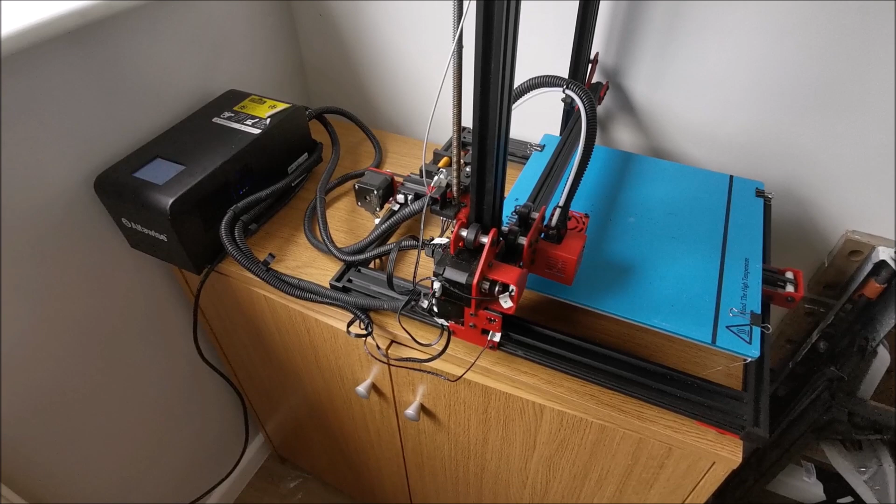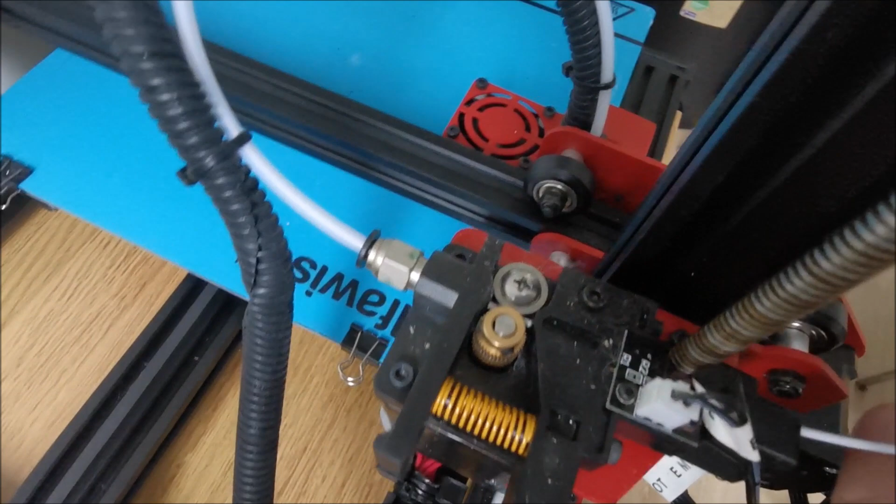So this is the 3D printer. What it consists of is this reel of PLA material that goes down here into this extruder. Basically it's two little wheels that push the filament down this pipe, and then that goes to what's known as the hot end, which is where it gets melted.

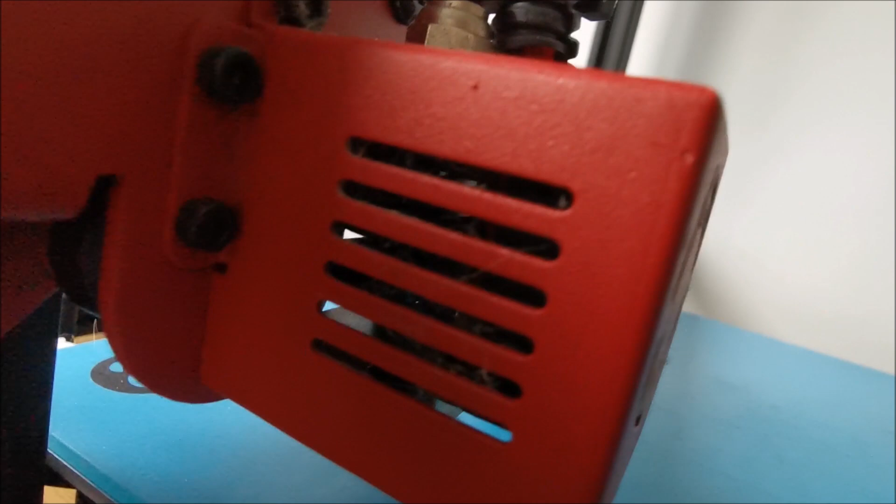And if you look underneath, you can just see the nozzle and a little bit of filament popping out the end there, and that heats it up to about 235 degrees centigrade. To get the 3D element, this moves up and down, and then the bed slides that way, so that gives you two directions, and for the third direction there's a motor that drives this whole carriage up and down.

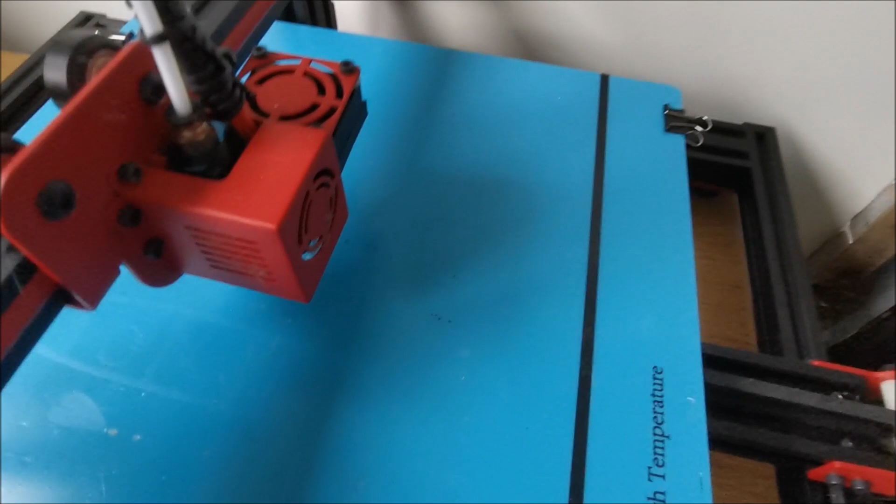So it will start printing onto this sheet, and it will do one single layer which is about 0.2 millimeters thick, and then it will move the carriage up another 0.2 millimeters and then do another layer on top. And all of that is controlled from this box over here.

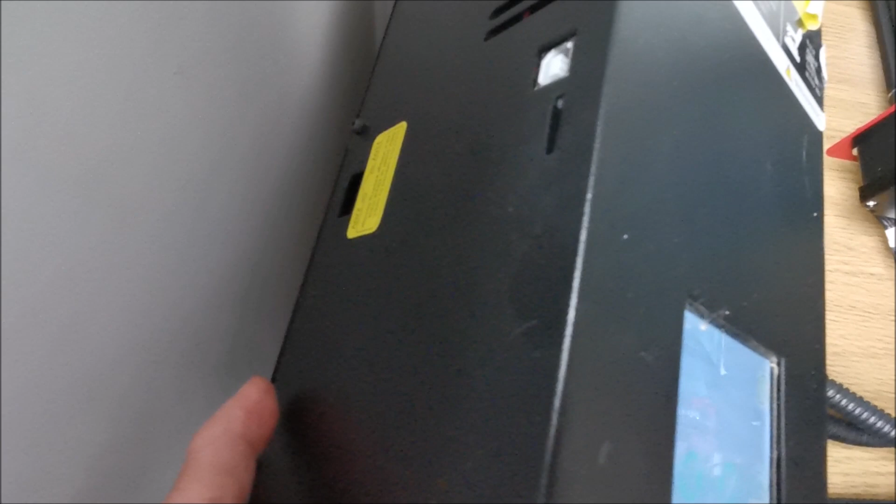There's a touch screen on this one, and on the side there's a memory card. You get your files from your computer, you download them and then you put them into the memory slot, and then you can send the information to the printer to print.

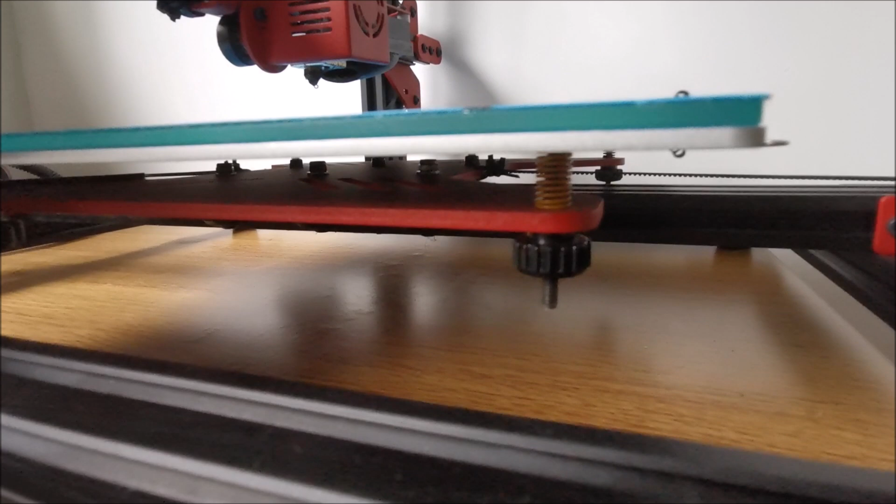But before you can do any printing, you've got to make sure that this heated bed is level. To do that you have to switch the printer on, heat up the filament, and also heat up the bed, so if there's any distortion in the bed through the heating up process, you take that into account, and then you calibrate the height of the bed by adjusting these little knobs underneath. So I'll go ahead and do that in a minute when it's heated up.

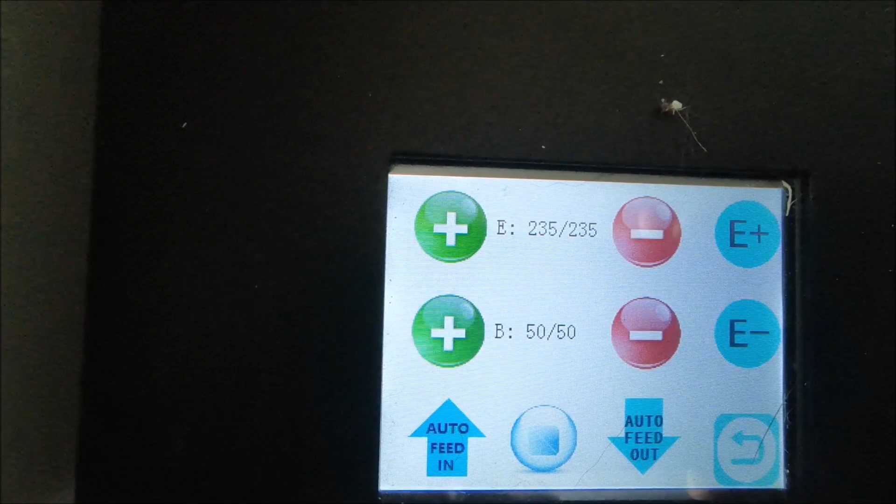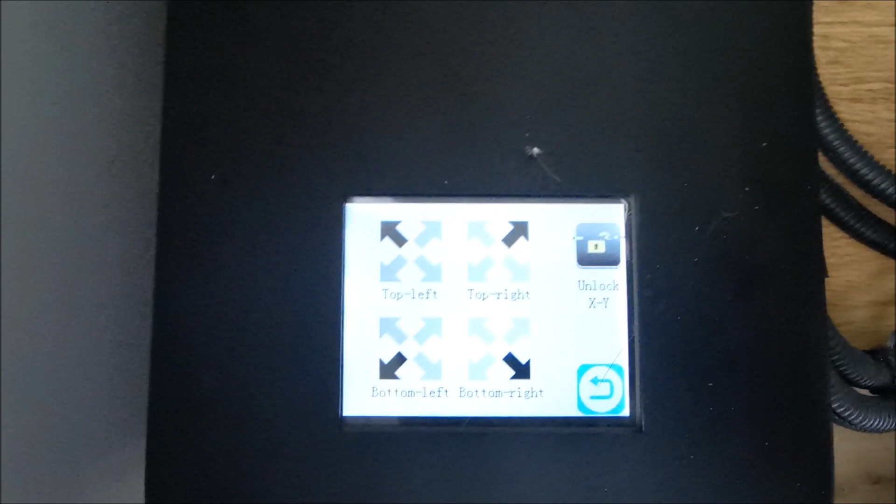Okay, right, I've set the temperature of the extruder to 235 degrees, and I've also set the temperature of the bed to 50 degrees. So now we can go ahead and do the calibration of the bed. So we'll go back a menu and do this leveling, and then if we press one of these buttons, it will go to the four corners, whatever one you select here, and drive the

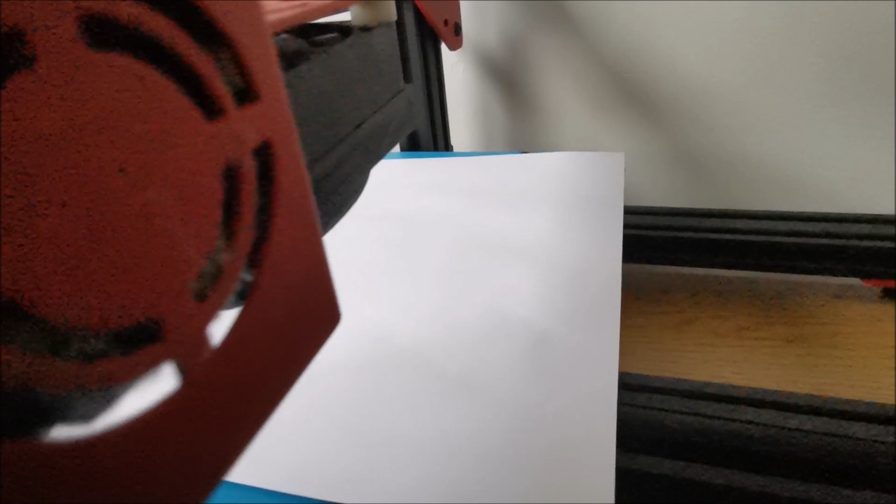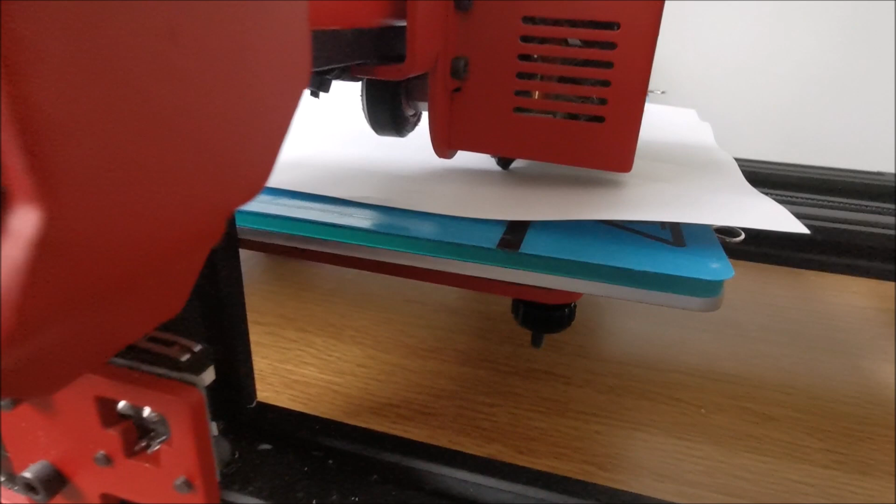What you do is you put a piece of A4 paper on the bed. This will drive down until this switch has been activated, and then you set the bed leveling by just having enough pressure on the paper, so you can move it up and down easily with just a tiny little bit of grip on the paper. So that one's not too bad. It's just like feeler gauges, if you're used to that. So drive to the other side.

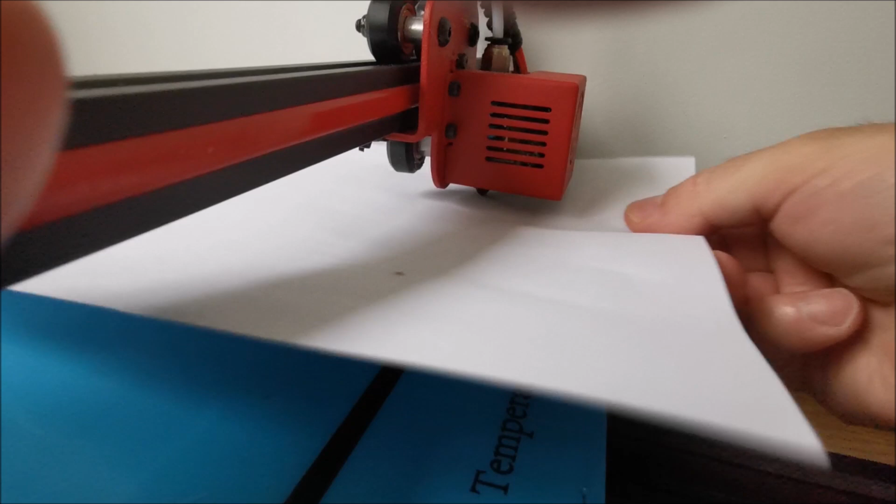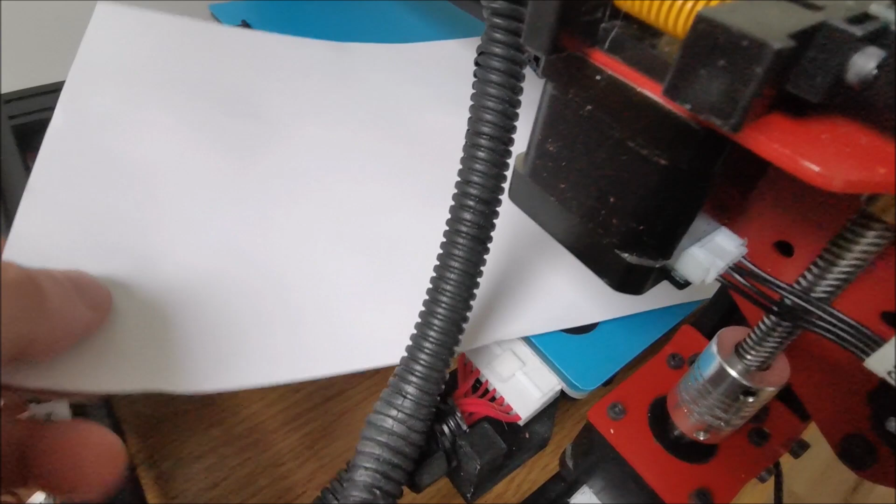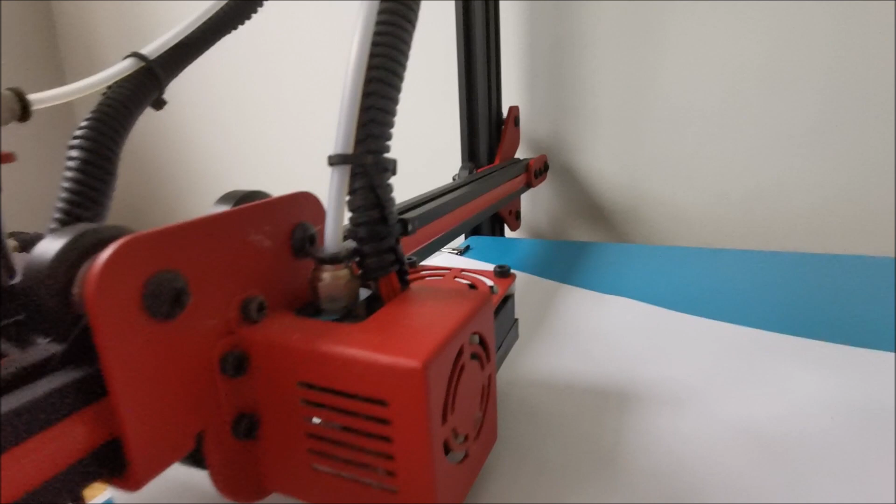I'm not expecting this to be too far out. It's just gripping the paper there. So we'll move to the other side. That's a bit too loose there. So I need to adjust this little wheel here, I'll be doing it the wrong way first, until it's a little bit tighter on the paper. So I'll go ahead and do all that and then we can start printing.

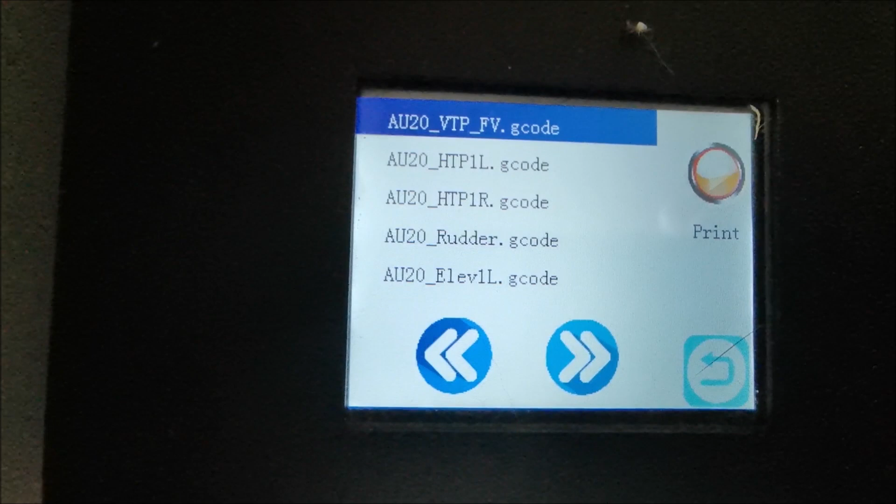Right then, so the bed is now level, so we're going to select a part of the plane to print. So I'll go to folder, and we're going to print this vertical tail. So all we do there is select it, and this G code is being generated by the computer, like I said before. So all the settings for the printer have already been decided.

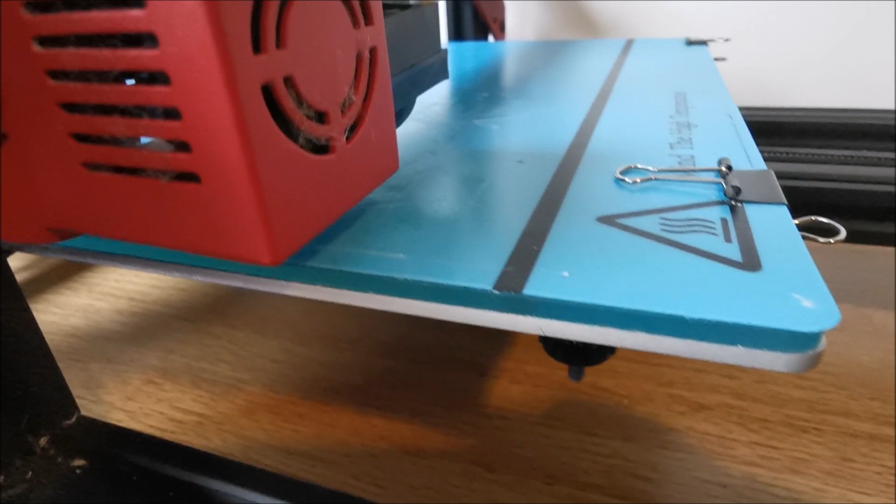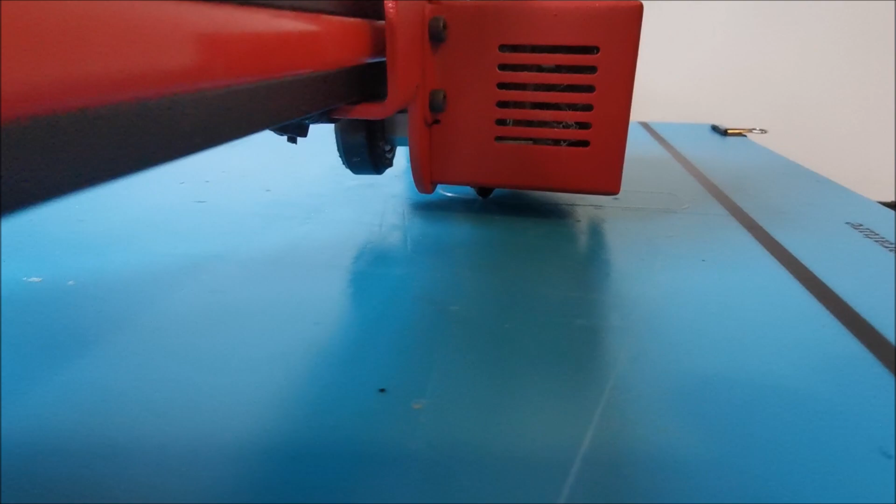And if we just want to print another one out, all you've got to do is select it, and as long as the bed is flat, you press print, the printer will home itself in the 0 position, do a little piece of test flow, and then it'll start doing a perimeter wall around the outside of this particular piece. It's quite hard to get the camera in here to show everything.

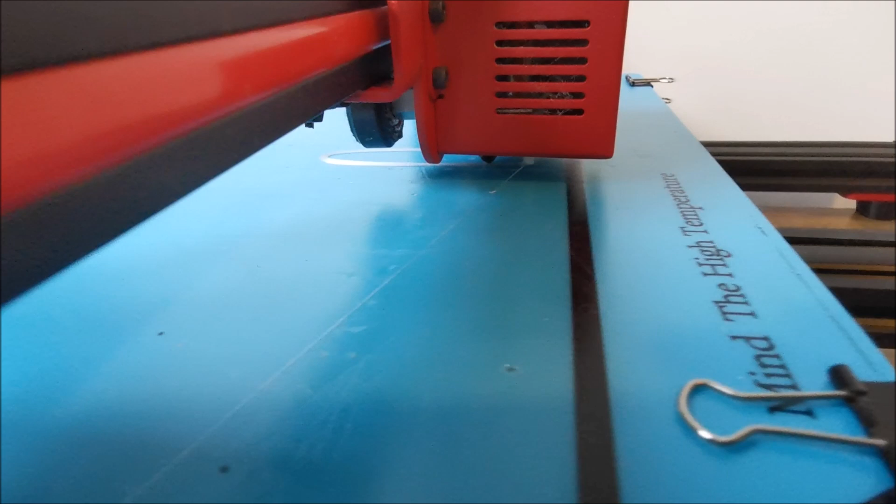So this is at the moment doing what's known as a skirt, which is a perimeter around the part you actually want to keep, and it helps it stick to the bed, because especially with these parts of the planes, they can be quite tall, and they can be knocked off of the printer bed by the movement of the head, or a slight movement in the air will just send it off.

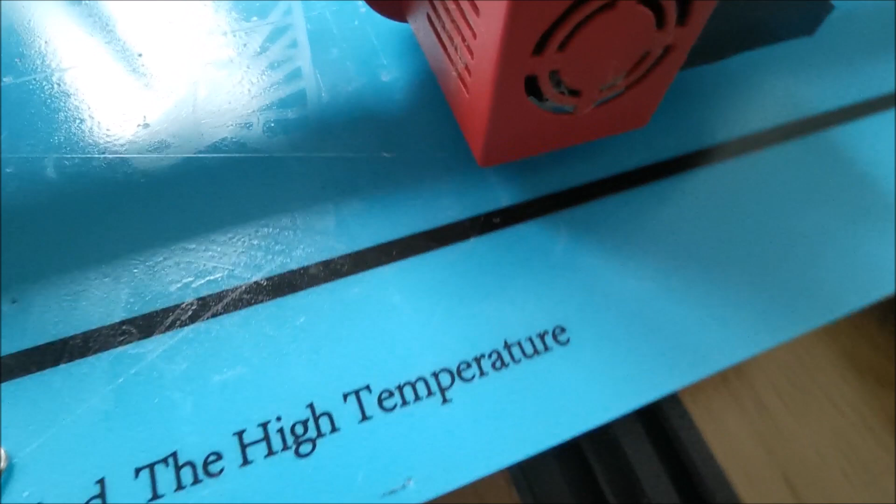So it's done the little perimeter, and it's starting to print out the actual part itself. We'll have to wait for it to move out of the way before we can see what it's actually done. And hopefully I can get it in focus.

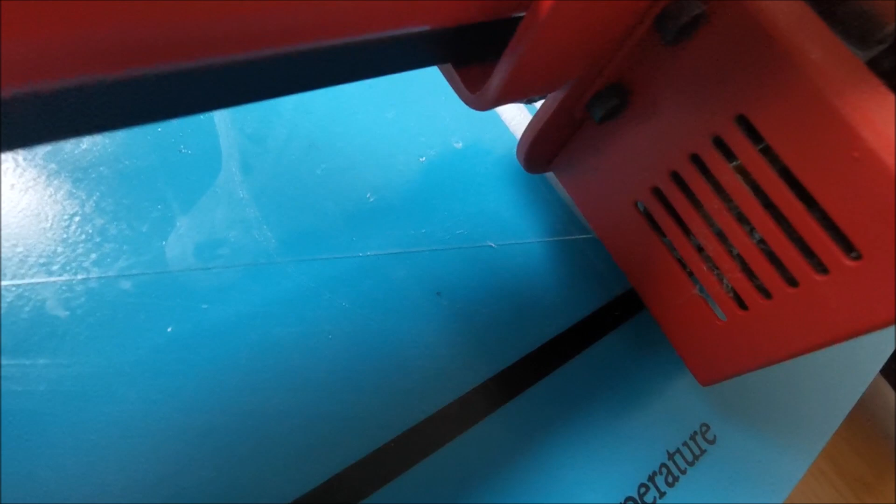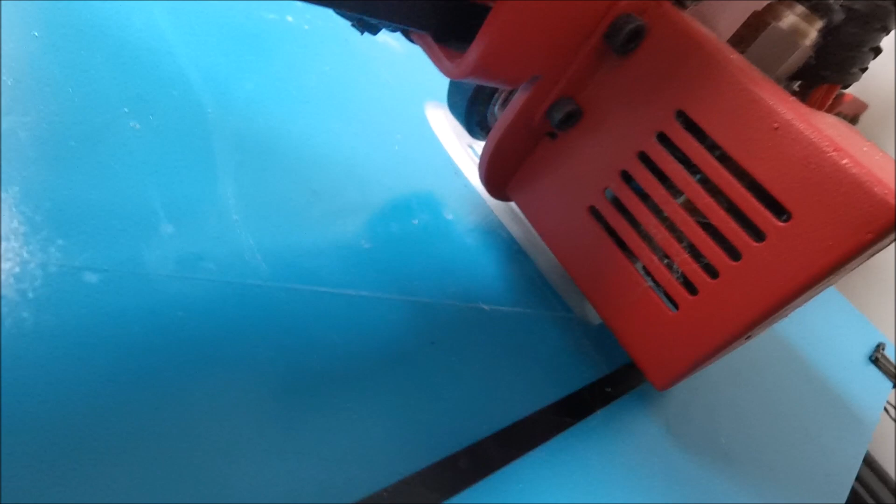So on this particular piece, it's printing a thicker base because you want a little bit of strength at the bottom of the tail. So it's going to do 6 layers, until it starts doing the little thin pieces for the outside edge. So I can get it down here.

Well, it's quite a slow process, as you can see, so this is probably going to take about over an hour to print this one piece out, so I'll pop back at various stages and you can see it then.

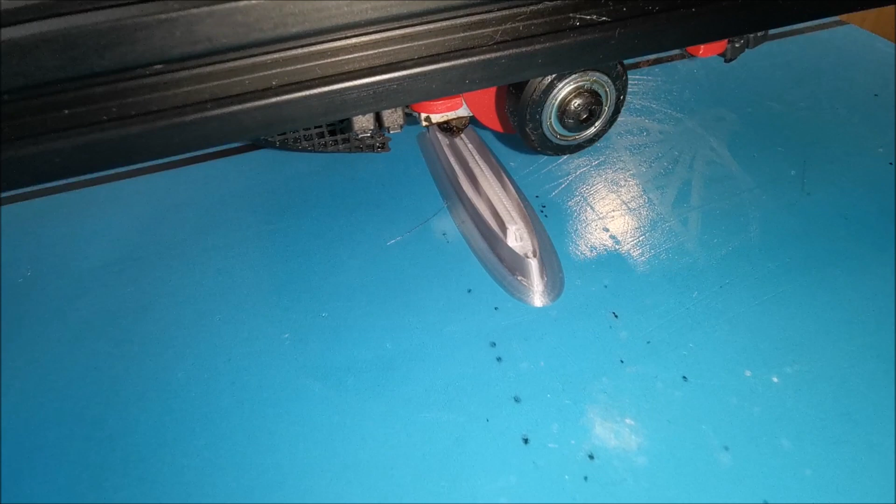What it's doing there with those small movements is just sort of stitching across the top, closing that end off, and then the rest of it will be hollow in the middle, and it will finish that centerpiece, and then the rest of it as it builds up will just be a hollow fin all the way up. I'll go around the sides so you can see if I can get to the bottom, see how tall that is now.

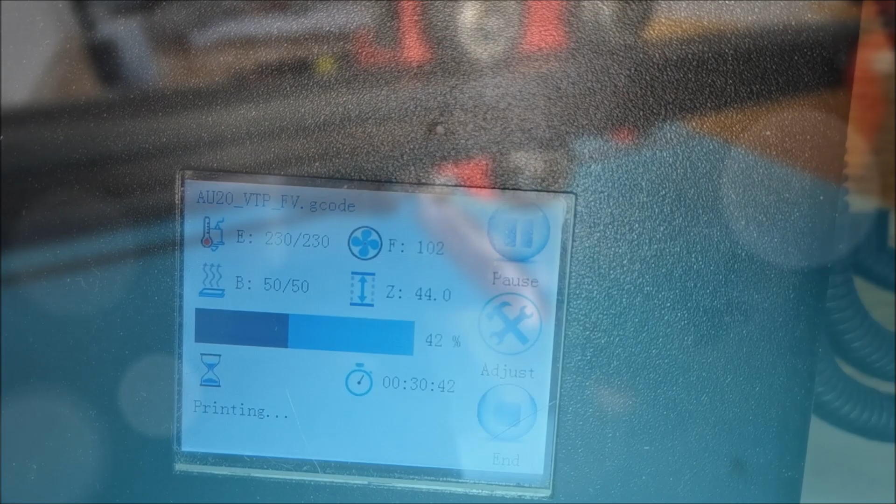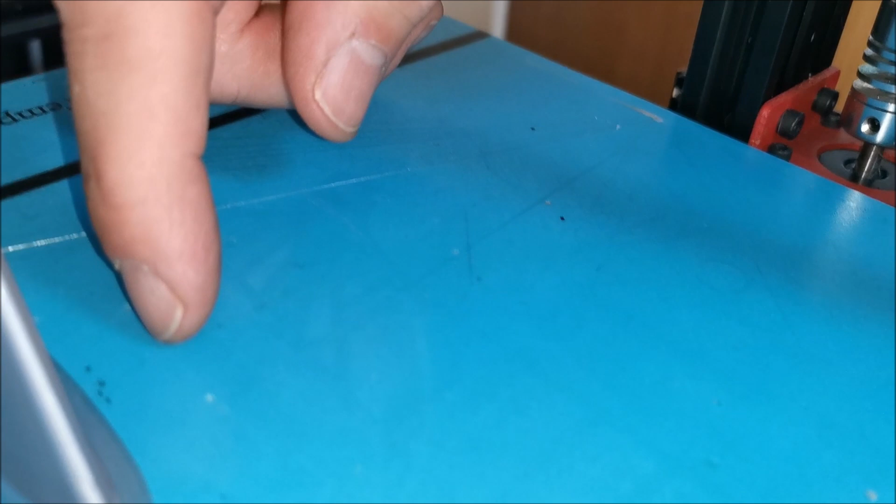Come back later. Well, it's been half an hour, so let's see what's been happening. Here we go. Are you ready? And that much has been printed. That's about, well, look at my finger by it, you'll see. Not that much. It's a slow process. So we get a bit closer on that.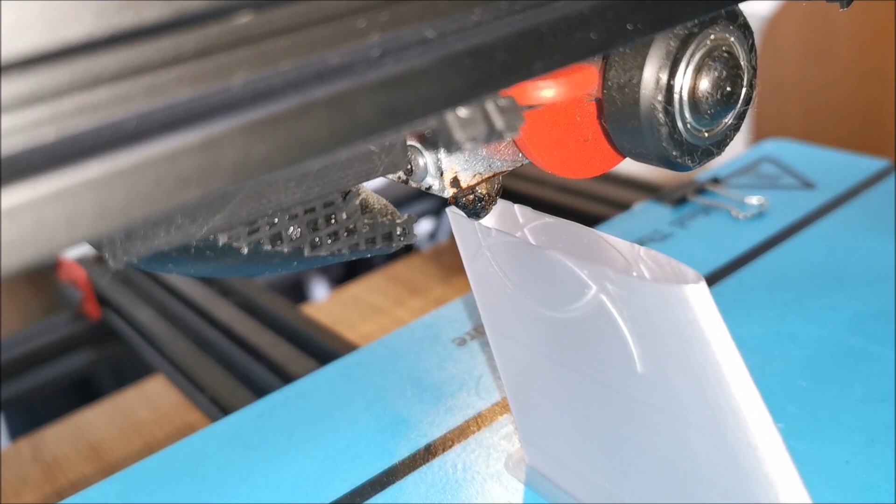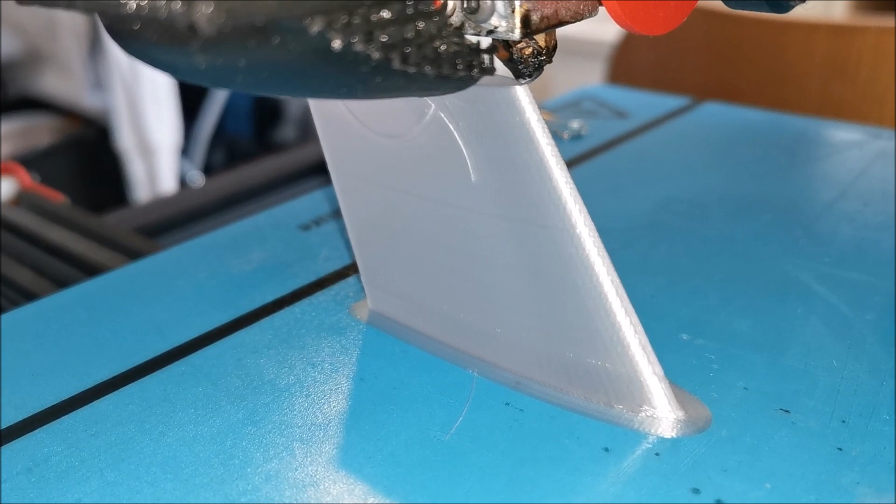On this piece it's printing the logo of the company that provided the files and designed the plane. We'll come back in another half an hour and see how much is done.

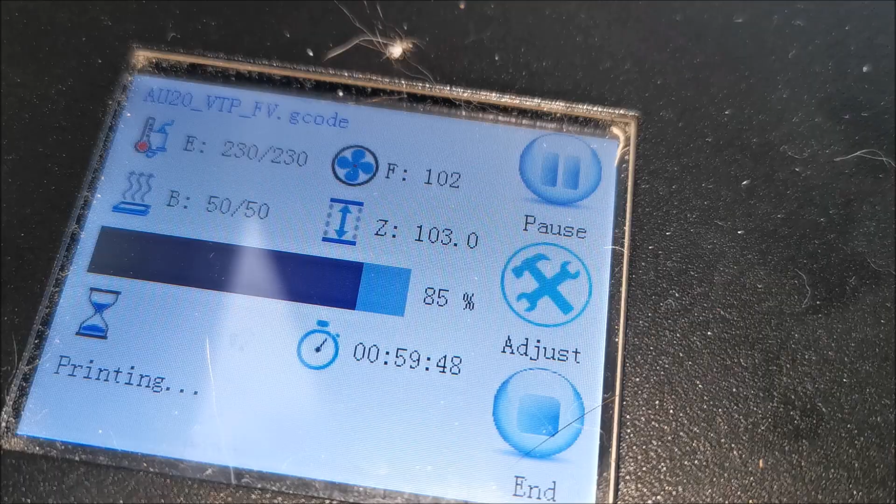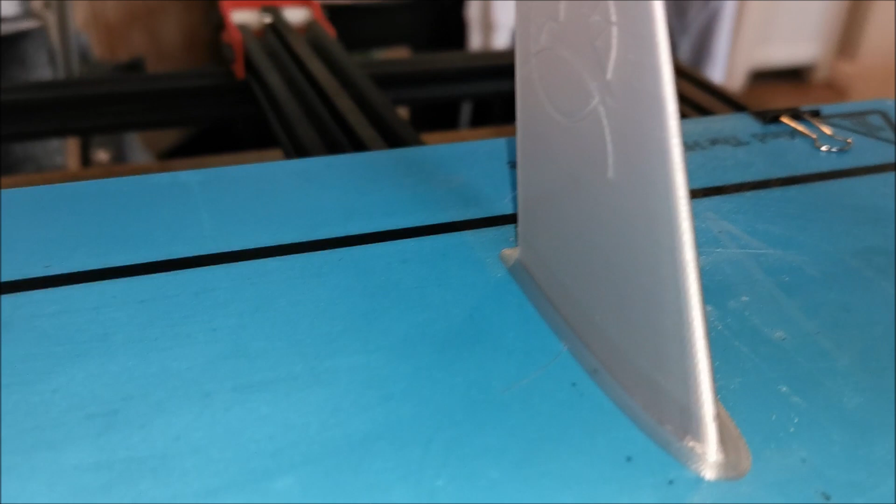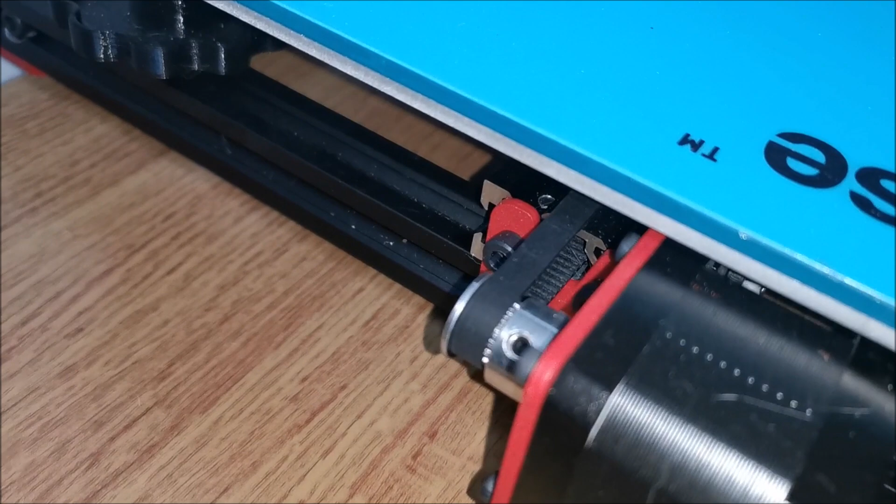Yeah, you could watch it all day, couldn't you? Well, maybe not all day. We'll pop back when it's about to finish.

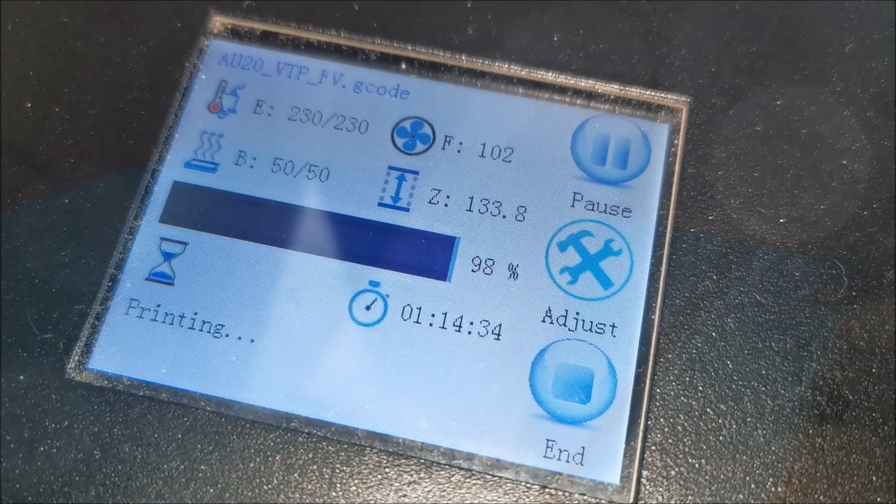Here we go, back at the end. It's about an hour and a quarter, 98% done. Let's move our way over to the printer and we can see how much has been done now. That's just finishing off the top. So hopefully, not too long from now, it'll finish, and then move the tray out so you can take it off the bed.

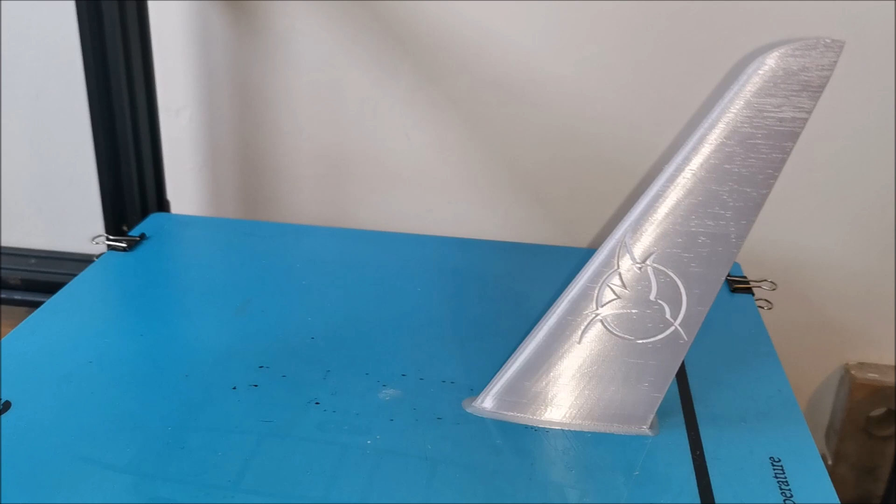That's it, finished. What we've got to do now is see if we can pop it off the bed. You've got a little spatula. It's best if you let it cool down a little bit first, but we'll see what we can do. There we go. So you see what I mean? If you didn't have that little brim around the outside, it wouldn't stay stuck on very easily. It's a bit fussy on that.

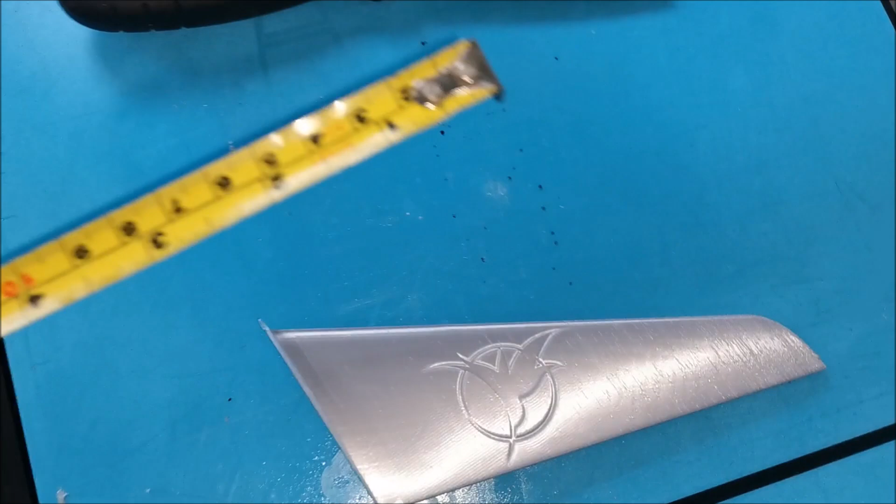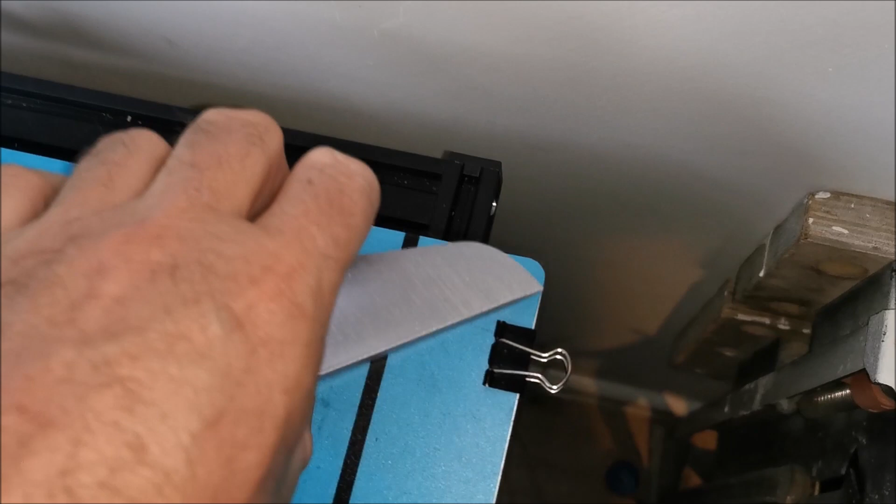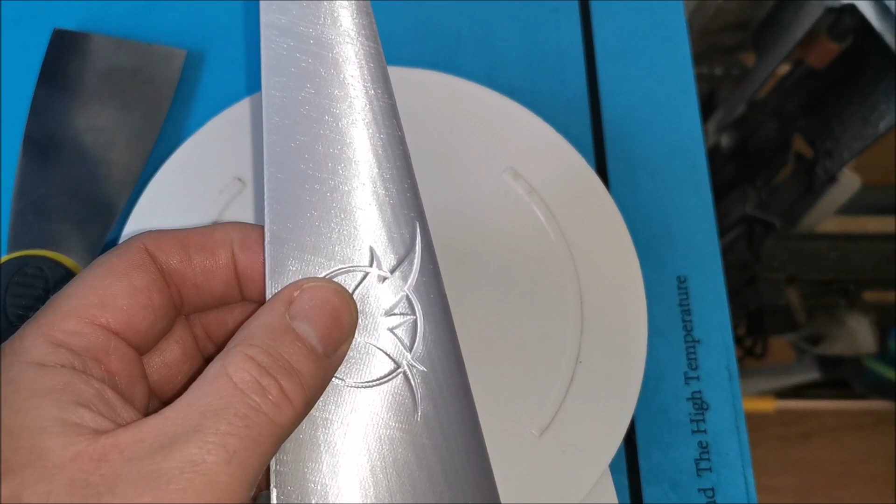And for those who are into planes, we'll give it a quick weigh. And with the little brim, yeah, 8 grams. So that's quite light, reasonably strong on these smaller pieces. And just press print and wait an hour and a quarter and you can have another one.

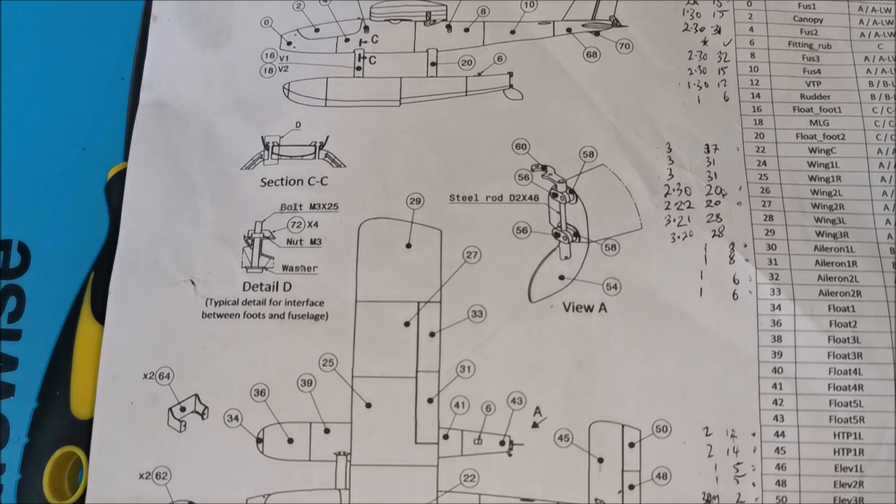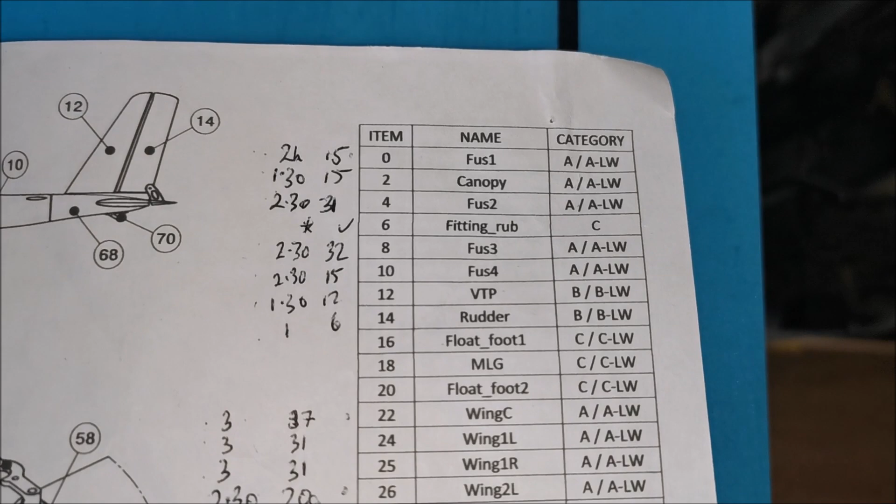But of course it does take quite a while to print these planes, and this is the sheet that the manufacturers provide, and this is all the pieces for the plane. I mean, this one shows the skis because it's a water ski plane, but that's a list of all the parts. That's just some of the printer settings to set up the actual printer in your slicer that makes the layers, and that's a list of all the parts to make that plane.

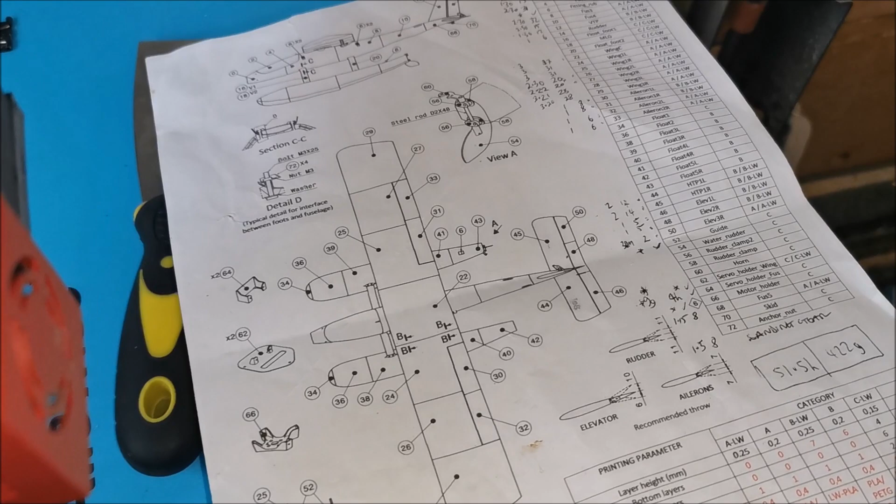So it does take quite a while. I said it's about 51 hours and 422 grams in total for the weight of the whole plane. And you know, this is quite an easy starter plane really. If you want to go for something a little bit more sophisticated, I've started printing another one, and you'll see this is the wing structure for that particular plane.

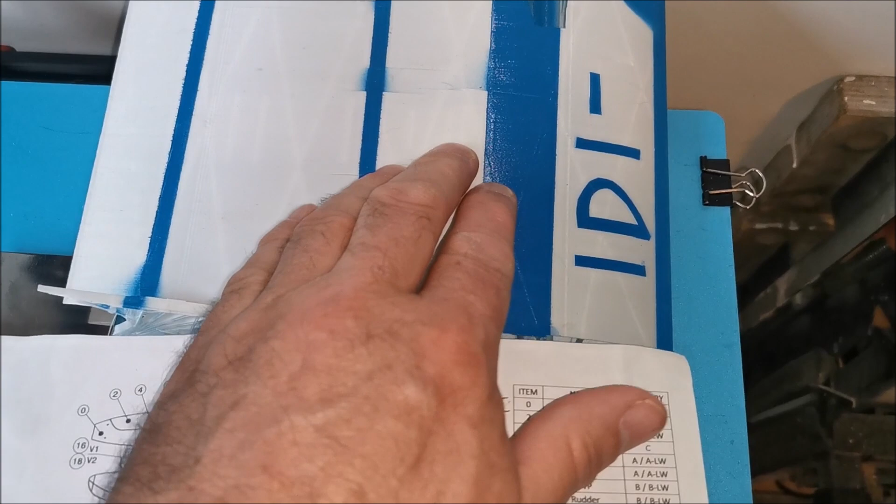I've started just experimenting with painting it as well, but this is substantially stronger than the plane. I mean, I've tried breaking it, and you can break it. You know, it's still easy to break, but it's a lot stronger. You see the pressure I'm putting on it there. It's a lot stronger than what the other plane is. Maybe that one will fly one day.